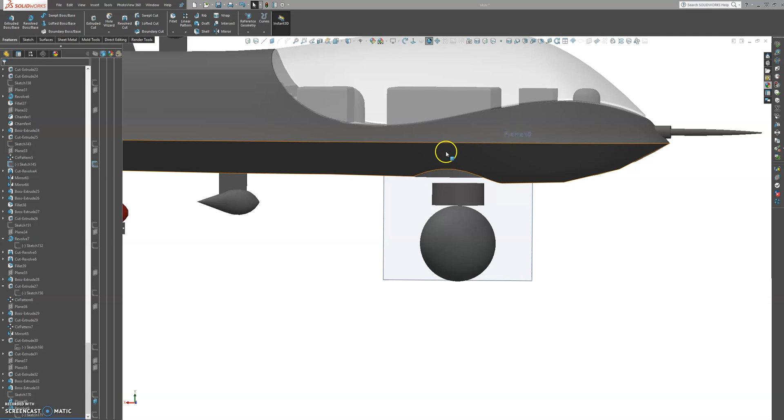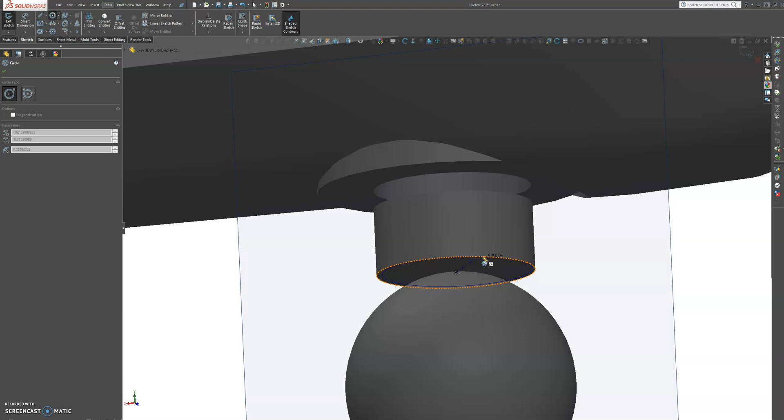Let's create a sketch on this face. Let's try to grab our center point from here. It's right here, good. We can come up to this edge here. Hold on a second.

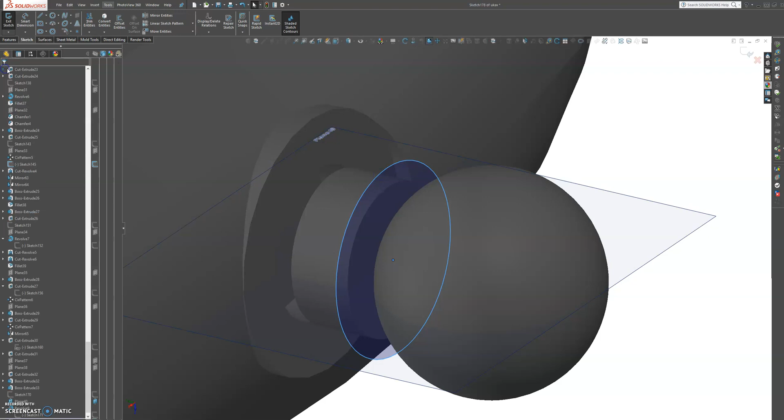Let's grab a circle. Let's try to grab that center point, and that's good. We're just going to come out some distance about here, and let's extrude it back a bit, about that far. That's good, because this will go in anyway. So I'm going to press OK on that.

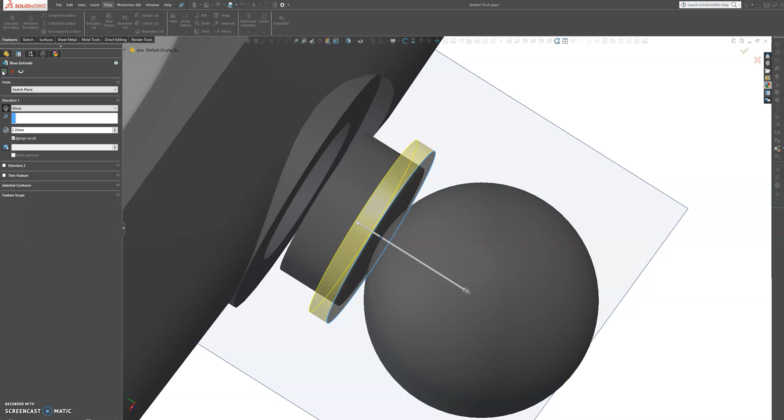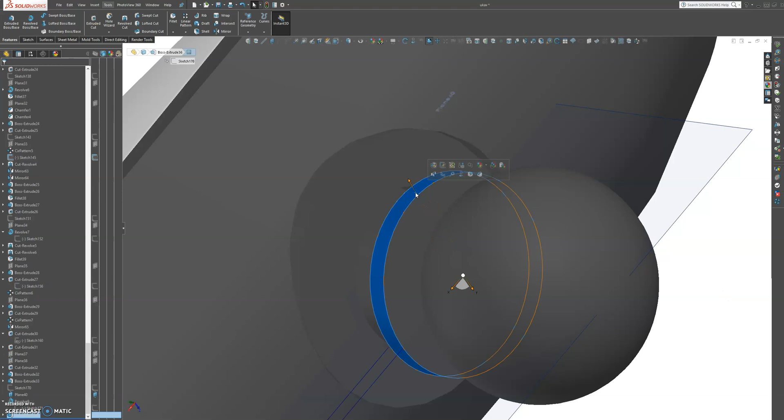Okay, and then quickly let's make a sketch on this face, on this face. Let's make a sketch on this face, yes. So that's the edge, so that's the sphere. Let's grab the, so we can see, so we know that this is our sphere, right? Hold on, let me just double check. Okay, so that is our sphere, and this is our inner base.

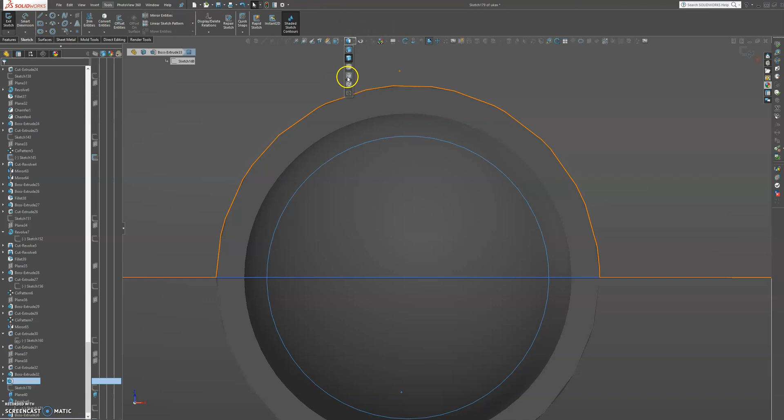So let me show you what we're going to do here. Let's go back to this one, and then let's go to this one. So this is our sphere, and this is the inner base, right?

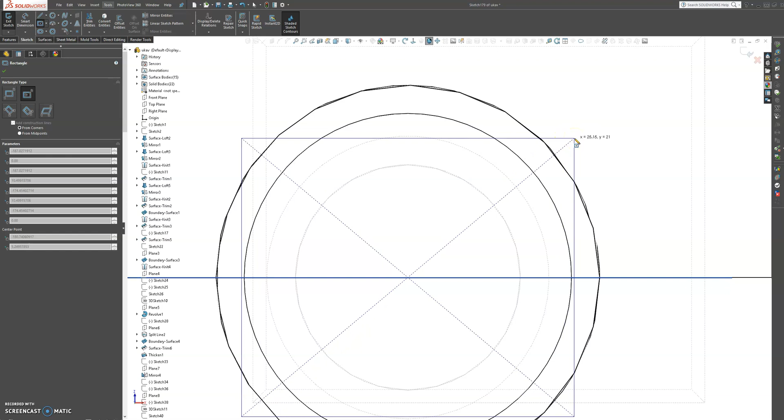So let's grab a center rectangle here quickly, and then let's try to get this center. Let's try to grab this center point somewhere there. There you go. And then we're just going to drag this out, so we know this is our sphere. And then let's drag it out to this edge here, and then maybe about here. It doesn't matter, because we can always make the base plate bigger.

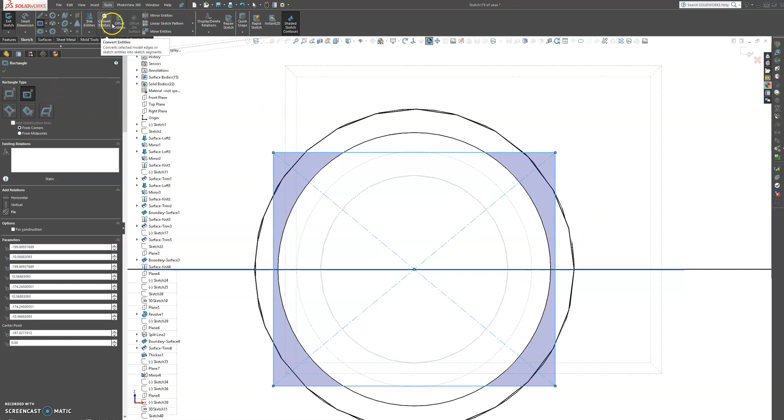So we're going to cut this about here. Okay, and then let's create another, let's offset this square. Let's uncheck bi-directional. Let's not do this way.

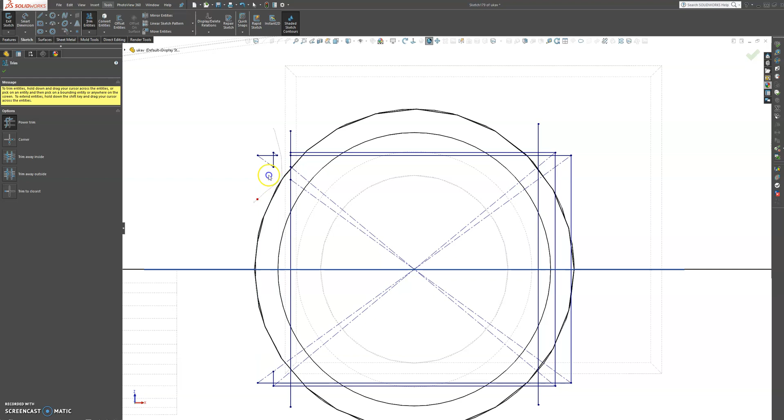Let's grab another one, another center rectangle, and then we're just going to come out somewhere about here. Okay, that's good enough. And let's just grab some lines here quickly, this line, and let's grab another line here. Okay, and let's just trim away these lines that we don't need. Let's trim these ones away.

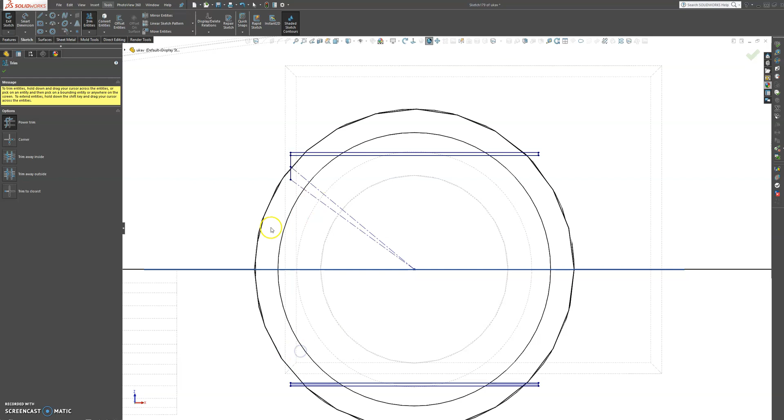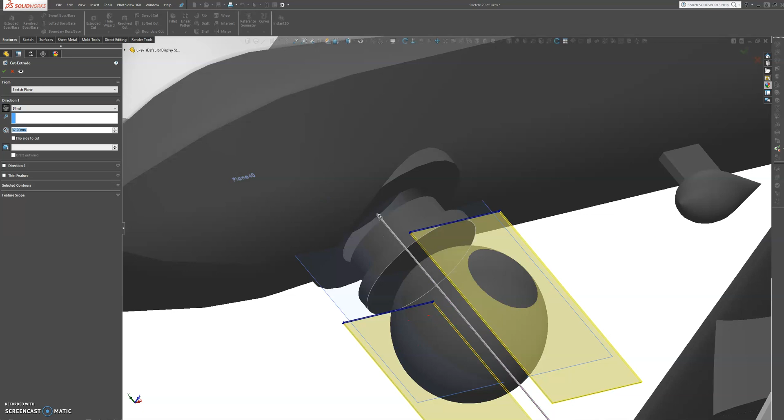Okay, that's good. Let's go back to our visual, and let's just cut through this sphere here with these entities. So let's go cut extrude. Let's flip that cut, it's going to cut all the way. We're going to choose all bodies.

That's good. Okay, so what we're going to do now is we're going to grab this edge and grab that edge so we can see that, and we're going to get to normal to profile.

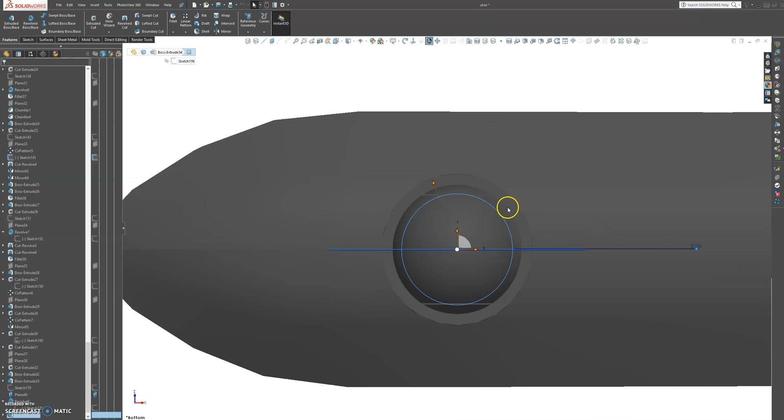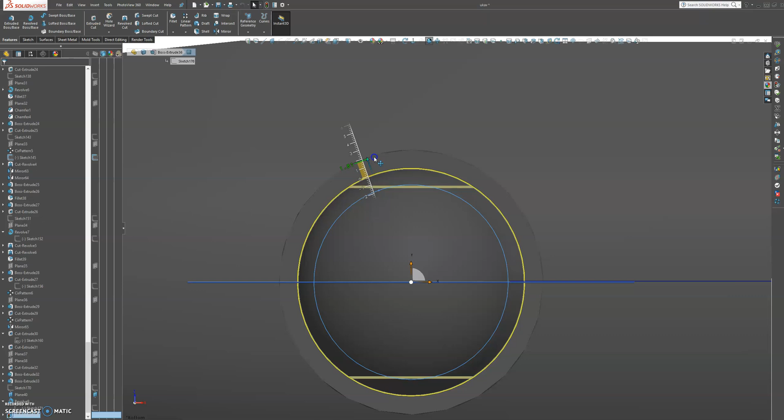So now we can see our base plate. So we're going to come out with our base plate about to the edge of that. Well, at least we will try. Something like that. Okay, that's good.

And then we're going to come into this face and make a sketch on this face, and it's going to convert. No, not that one. Control Z. This is what we want, convert entities, and we drop that line there which we want, and we're going to check another convert entities, this face here, drop it on there.

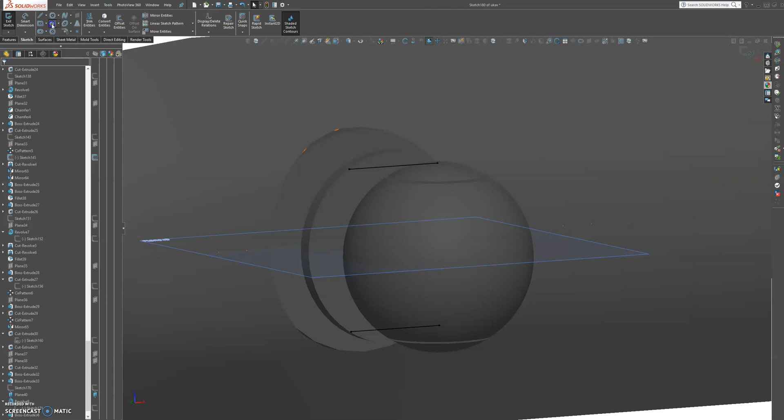Okay, and all we need now is a 3-point rectangle. From this point to that point, snap to that edge, and let's create another one from this point to this point, and we're going to snap on that edge. From this point to this point, and let's snap on this edge.

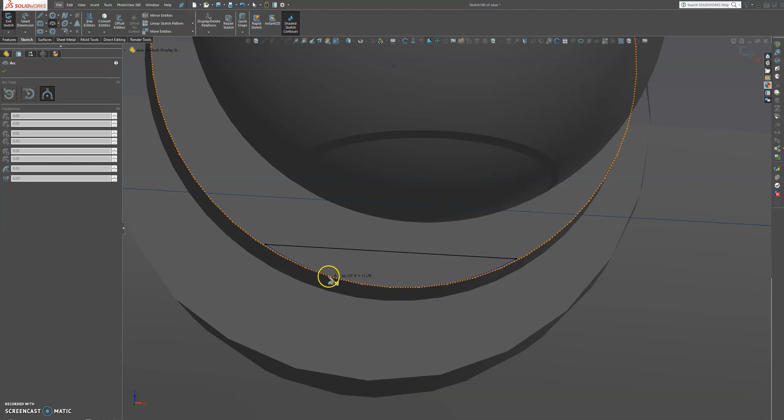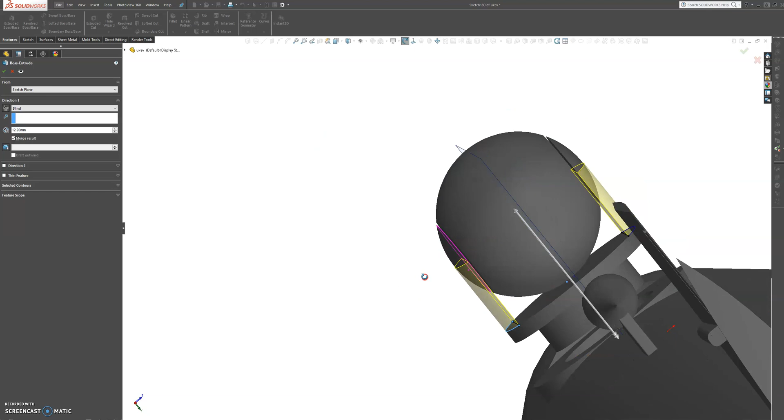Okay, and then we're just going to extrude into this body. Extrude, and we're going to come about halfway, about there. Okay, that's good. Press OK on that.

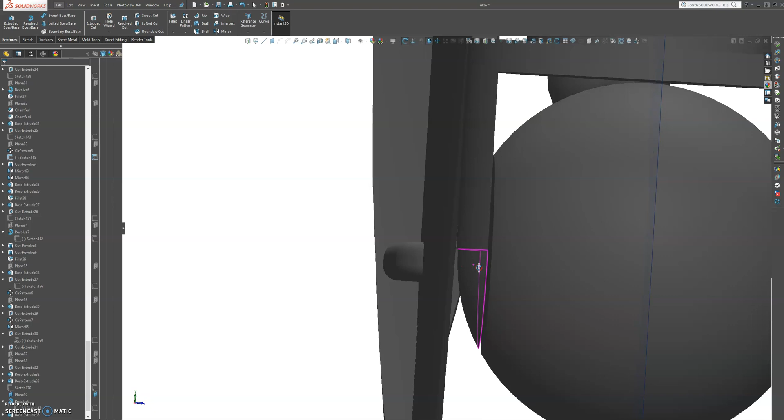So that's pretty good. It is not a landing gear. In case you think it's a landing gear, it is not a landing gear. We will add our coincident relationships in there.

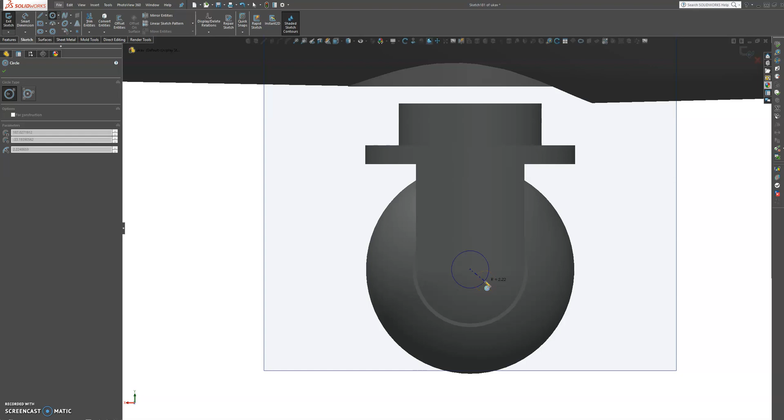So let's make a sketch on this face here, normal to profile, and then let's grab that so we can get the center point somewhere around there, and then quickly go over to extrude that cut, and we're going to go bi-direction, also both ways, cut that all the way through. That's fine.

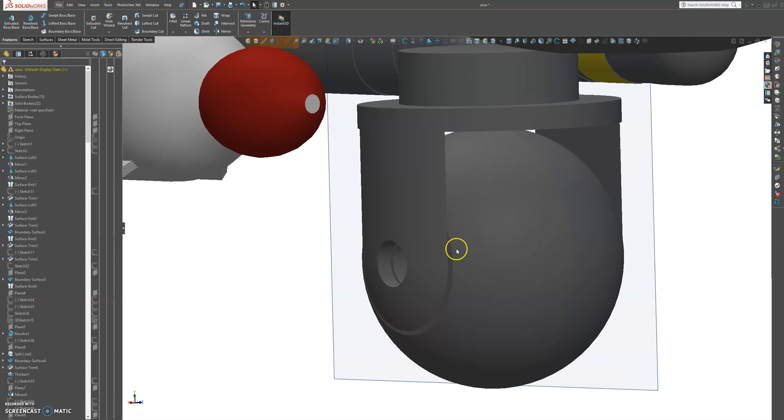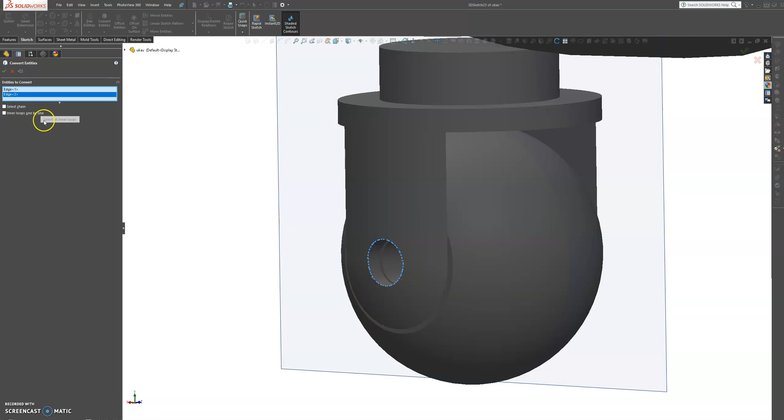And then we're just going to come in here and come to surface and cover this face. So we're going to planar our face. But before we do that, let's go to sketch, 3D sketch, and then convert entities. We're going to convert this edge and this edge. Okay.

Unfortunately, we have a step in that. So we are going to do this differently. Let's get rid of this 3D sketch.

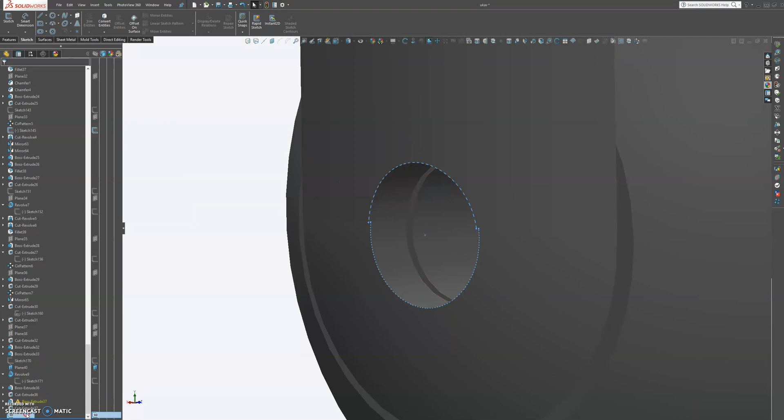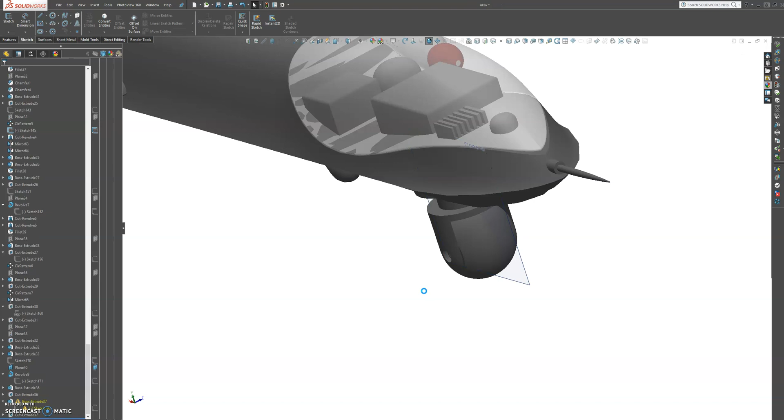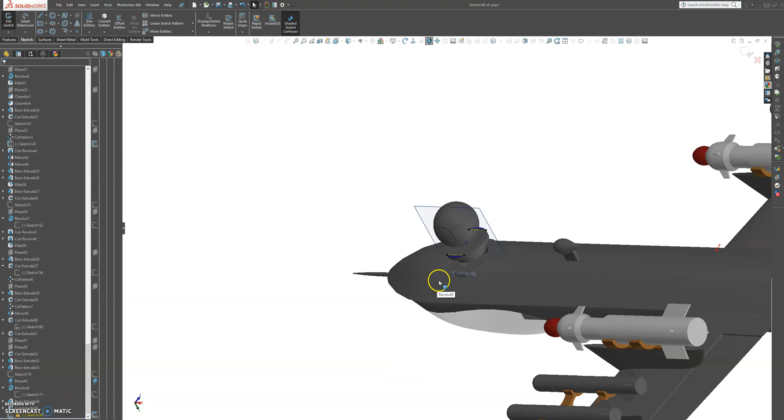So let's just quickly go back here a few steps. Let's exit this sketch, and let's delete this sketch here because it's giving us a problem. So let's do that again.

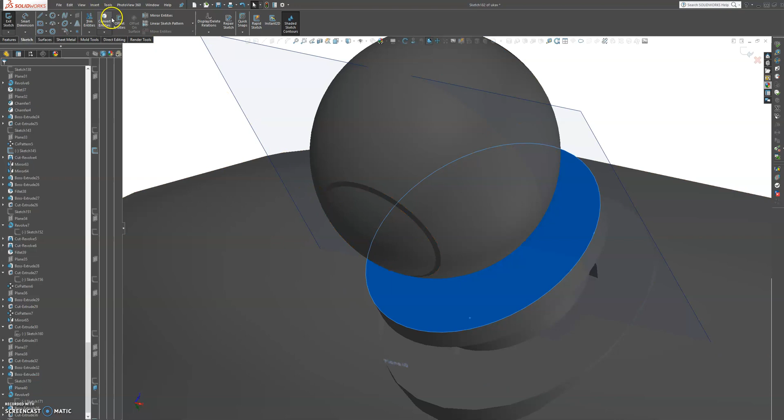Let's sketch on this face, and then we're going to go over to convert entities, and not this one. So let's go again, convert entity. So let's choose this face and then convert entities. So we have the line now.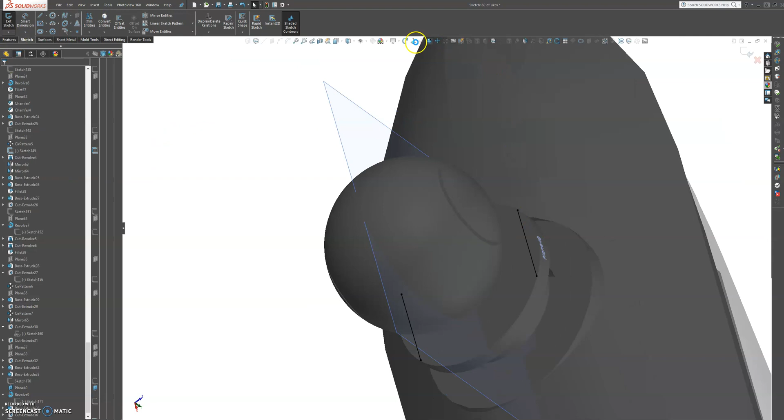And then we come over here and we choose this face, convert entities, and then we have that line. Okay, so let's get a normal to, see what we have. And then we want to get this face, not the base plane.

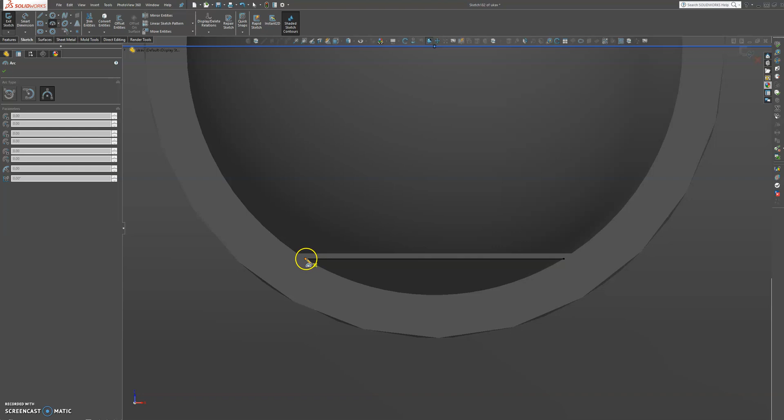So let's go to 3-point arc and then get these points, and we're going to snap to this face. And that's going to look a lot better. And let's grab another 3-point arc, and we get from these 2 points to this face here. Okay, so that looks better already.

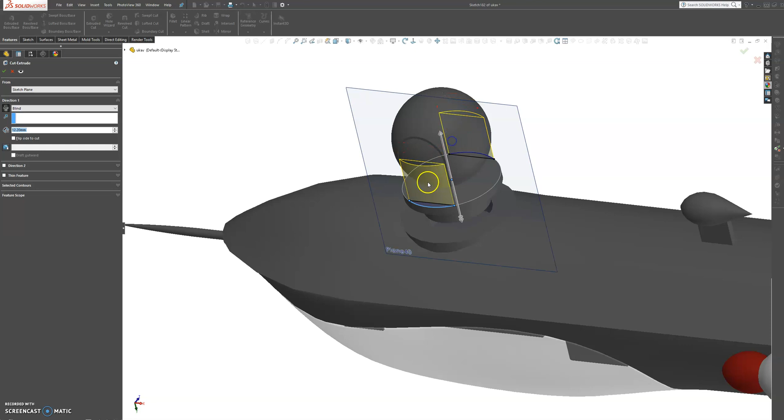Okay, so let's go back to features and extrude that cut. Let's go to somewhere midway, it's halfway, and let's see how that looks. So that looks almost perfect. Okay.

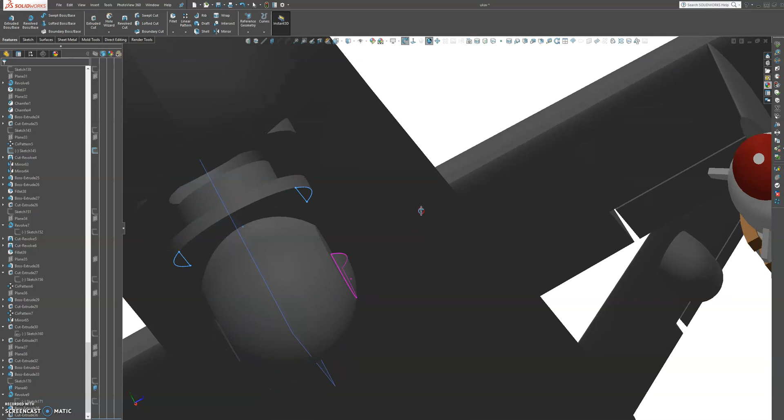So now, oh wow, instead of extruded cut we should get extrude. So let's go back here. That looks good. Let's go to features and I go to extrude, about halfway.

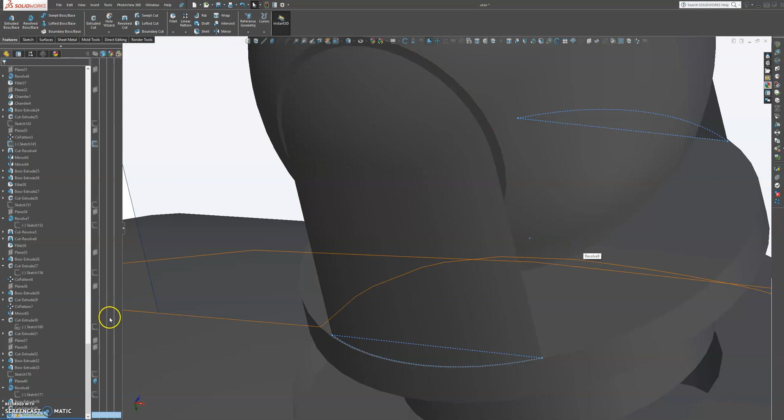That's not bad, we still have that step in there. Okay, so that's fine. Let's come down here. Okay, that looks good. Okay, so yes, so let's make an extruded cut.

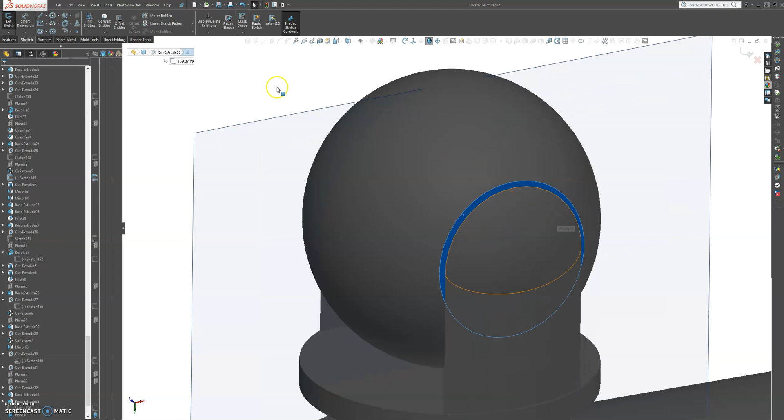Let's make a sketch on this face. And let's try to grab that center point from this edge. Let's just double check it, we are exactly on the center. Okay, and then we're going to come down about there, and then we're going to extrude cut.

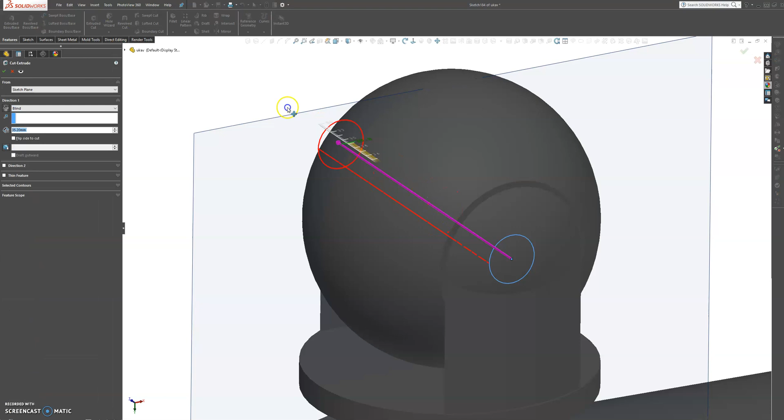We're going to cut through the whole thing on each side. That's okay on that. And now let's try our planar face.

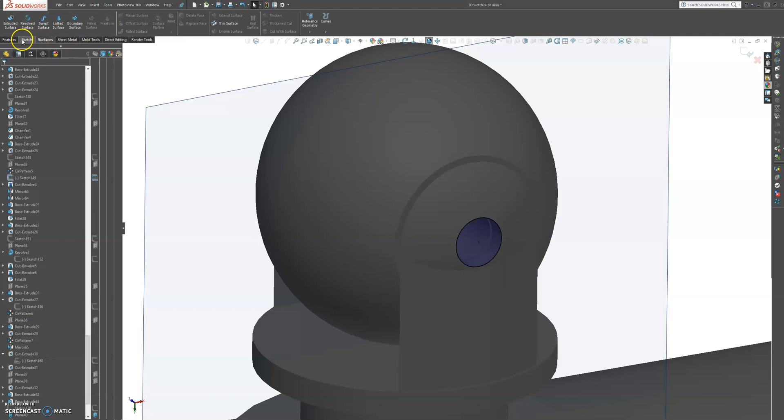Let's go to sketch, let's go to 3D sketch, and then we're going to convert this edge, which is good. And then we're going to surface, we're going to sketch, let's do another one as well. So let's convert these edges here. Okay, that's good, exit this sketch.

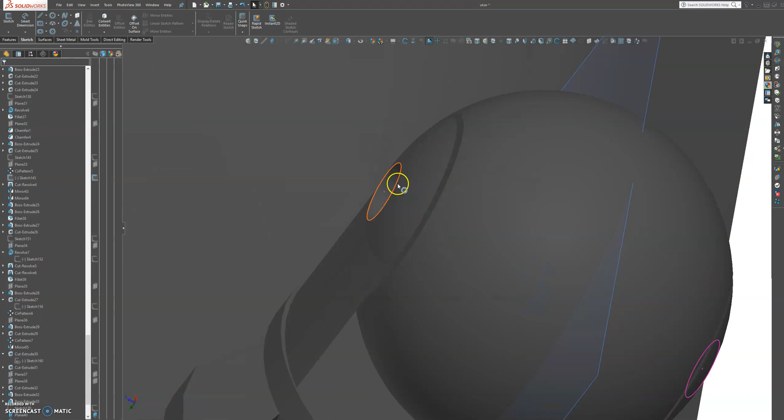Okay, and then we will try to fix that later on. Okay, so let's go to surfaces, let's go planar surface, let's do this, let's choose these two.